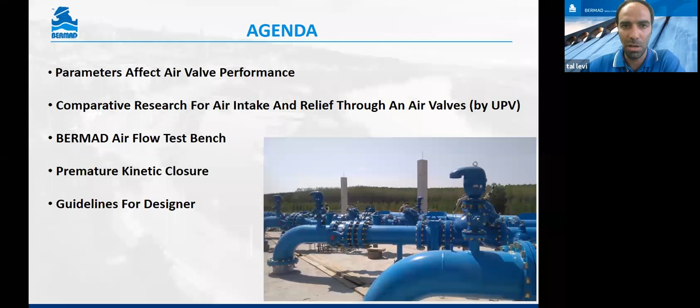So first, I would like to count together with you the 4 main needs and requirements why air valves are essential in water pipelines. First of all, the most common one that most engineers are familiar with is prevention of air pocket accumulation at high points.

On the high points, the air tends to accumulate, and some air which is dissolved in the water is released on those high points, which have relatively low pressure, or due to head loss along the line, it starts to be released from the water. And we get air accumulation on those peaks.

Of course, those air pockets create local head loss, and as we have more and more peaks along the line, we get higher head loss, which means that now the pump, for the same design flow rate, needs to provide higher pressure, okay? That, at the end of the day, is converted to higher energy consumption of the pump and higher cost for delivering the same flow rates.

So the first objective of an air valve is to release these air pockets and to maintain a full cross-section flow. That's the responsibility of the automatic orifice, a relatively tiny orifice between 1 to 4 millimeters in size.

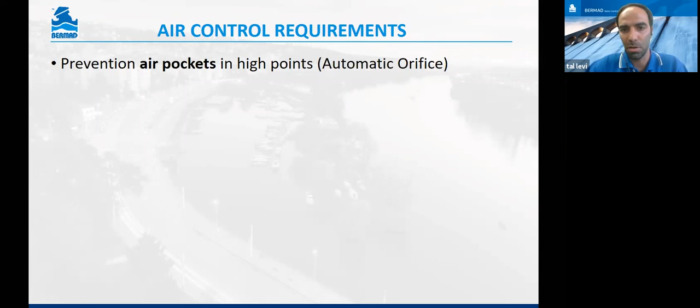So the tiny orifice of the automatic feature is relatively small due to the fact that it releases air while the system is pressurized, and opening a very small nozzle is enough to release those tiny volumes of air. So that's the first objective, and that's actually the only requirement and mission of the automatic orifice. During this presentation, we won't talk about the automatic orifice. We will focus on the kinetic orifice, okay?

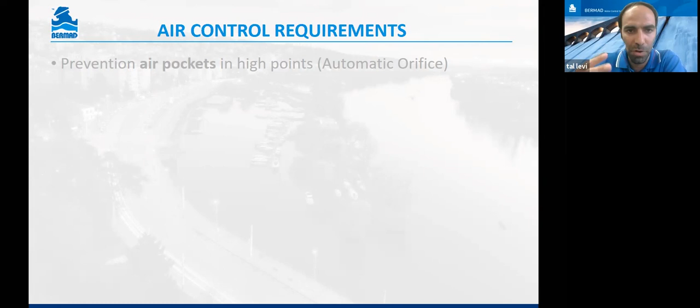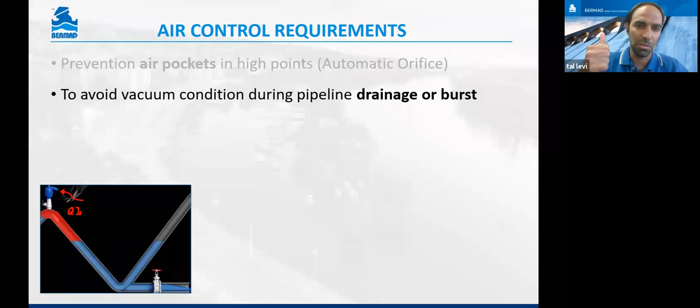The kinetic orifice is responsible for three main objectives. The first one is to prevent any vacuum formation during drainage or burst, okay? Whether you are doing maintenance or cleaning the pipeline and you drain the pipeline from a low point. So at this event, the air valve, in order to prevent vacuum on high points, needs to draw into the line high flow rates fast. So that's why we are using a large orifice, the kinetic orifice. So that's the first requirement.

The second requirement for the kinetic orifice is to allow safe and controlled pipeline filling within a reasonable time, especially in the irrigation sector, where the pipelines are filled and drained on a daily basis. So during a startup, the pipeline is full of air. We need to relieve this air in a controlled manner in order not to create pressure surge. And it's also done through a large kinetic orifice, which allows high flow rates. So that's the second objective of the kinetic orifice.

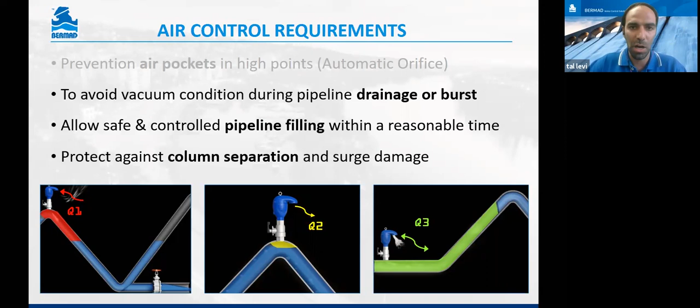The third, and from my point of view the most important one, is to protect against any transient scenarios which will lead to pressure surge, water hammer, and in severe conditions to water column separation, okay? For instance, we have a pumping station, and during pump shut-off, the water continues with its momentum to flow forward while water stops flowing from the pumps, and that means that between the check valve and the rest of the pipeline, water column separation and severe vacuum conditions might develop.

In order to prevent this water column separation, we need to draw into the line high flow rates of air, high volumes of air, and fast. So that's also done through the kinetic orifice. So basically, these three objectives are achieved by the kinetic orifice.

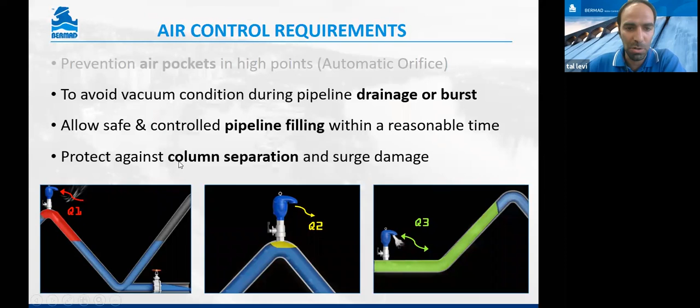And in case the performance of the kinetic orifice is not good enough, or it's not sized correctly, it will have a direct impact on achieving one of those goals, okay? So if the kinetic orifice is too small, there is a chance that the pipeline will collapse due to vacuum conditions, or rupture due to pressure surge.

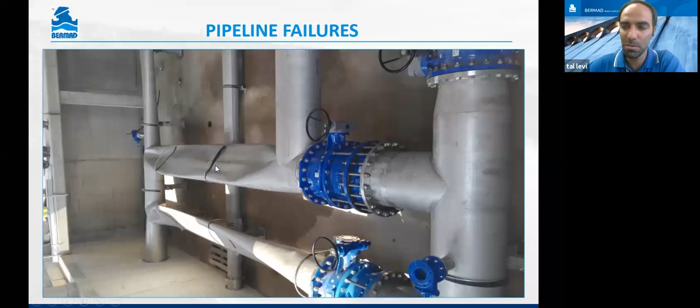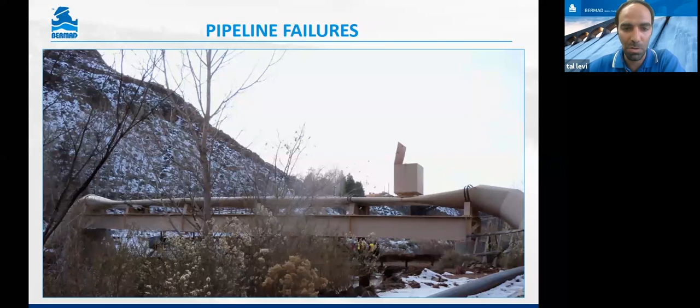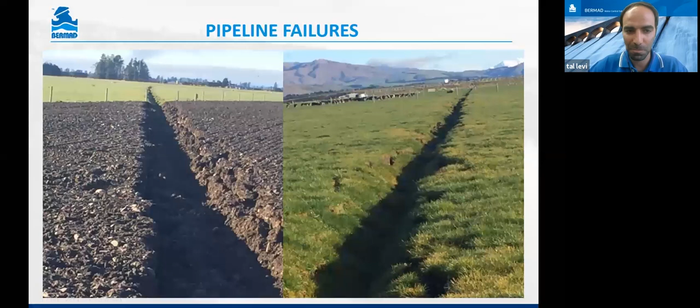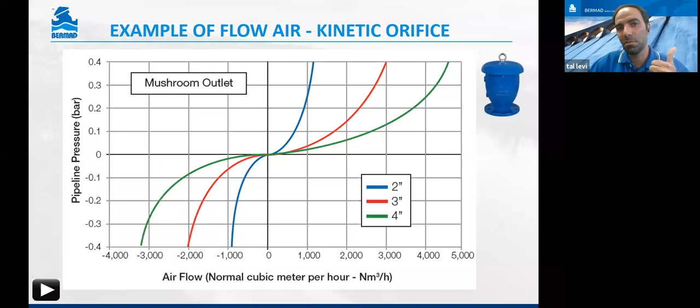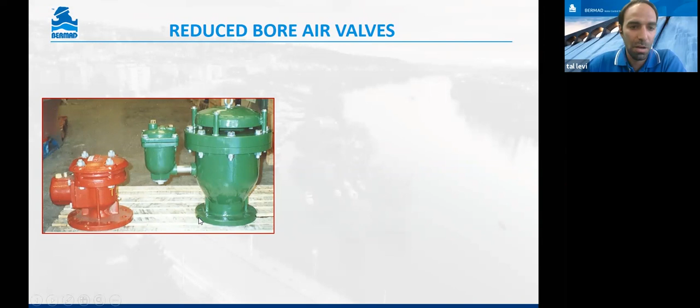Friends, what we are looking at right now, these two air valves, if we consider them in a tender specification, both of them are defined as 6-inch, okay? Because we define the size of an air valve based on its connection size. So both of them have a flange of 6-inch. However, and this is the kicker, you can see that the red one is dramatically reduced bore. The real passage of flow through the device is only 50 millimeter, while this one is a pure full bore orifice of 150 millimeter.

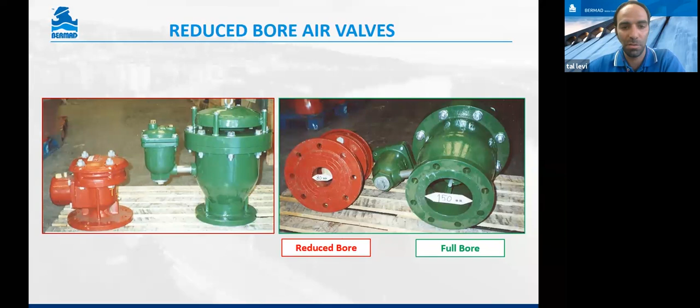Okay? So the second very important factor is what is the size or the actual passage of the kinetic orifice inside the product itself, and not only the connection. So at this slide, I would like to summarize together with you the three main factors which affect the performance of an air valve. First of all, that's the size of the kinetic orifice.

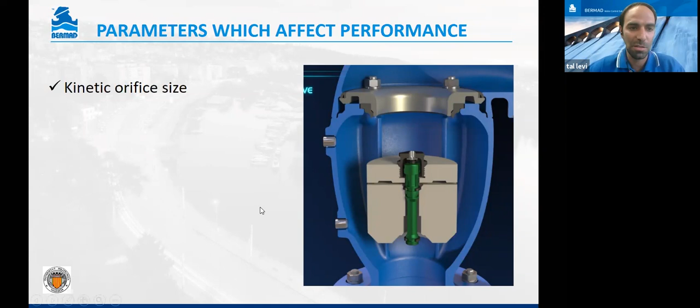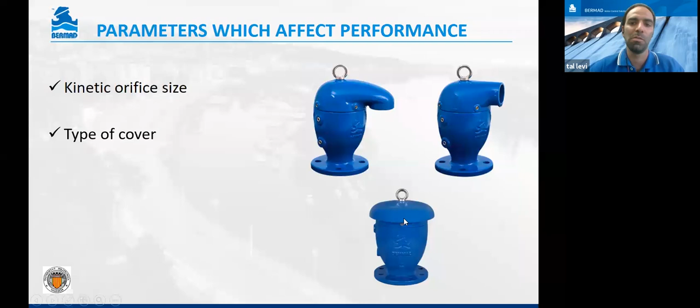The second factor, as we saw, the big difference in performance, is the type of the cover. So obviously the mushroom cover will bring higher performance compared to the down or the side. And the last factor, which is not less important, is actually the efficiency of the flow curve through the device, through the air valve.

You can see here in this demonstration that as those curves are more straight with fewer angles, the product will allow higher flow rates and will create lower head loss. Same as what we are doing with the 700 series valve or the 100 series valves. The only reason why they are Y pattern oblique is in order to create minor head loss, to allow as much flow capacity as possible and to make the flow through the control valve semi-straight. And that's what allows us to generate such high flow rates.

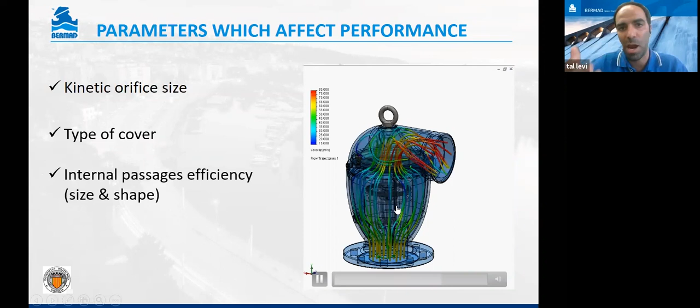Another important point while we are looking at the cutaway of this product: as you can see, all Bermad air valves are in the shape of an egg. The reason for that is to make the flow as aerodynamic as possible. In addition, there is an area between the float and the body itself. It's some kind of a ring between the float and the valve body. It's very important during the design to make sure that this ring doesn't create any bottleneck for the flow, and the total area of this ring is at least larger than the size of the inlet and the kinetic orifice. So those are the three main factors which will affect the performance of the kinetic orifice.

And before moving forward to the research, I will give a couple of minutes for questions. There are two questions here which I would like you to refer to. First of all, you didn't mention until this point the pressure rating or the operational pressure of the air valve. And the second question: is there any single coefficient that reflects the airflow capacity of an air valve, like a KV or CV value for a hydraulic control valve?

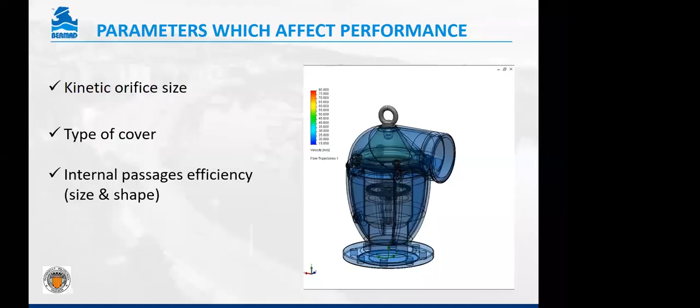The second question was regarding the KV or CV value, which is very common when we are referring to hydraulic control valves. So is there any equivalent coefficient for air valves? Basically, I mentioned that one of the factors is the internal design of the air valve, but hydraulic control valves are a well-established market. So the manufacturers have this factor which allows them to compare the efficiency or flow capacity of one product to another by only one factor, which is the KV value. However, in the air valve market, the manufacturers don't have this information.

In the technical literature, they mention something called the CD. The CD takes into account all those factors together, and considering only the size of the nozzle, you can say whether this nozzle will allow higher flow rates for the same diameter compared to a different nozzle of the same size but a different shape. This CD value runs between 0.45 and 0.57 or 0.6, but honestly, the majority of manufacturers don't really know the CD value for each of their products, and this value changes between sizes and models, and it's very difficult to measure. So that's why in the field of air valves, we don't have any single value with which we can compare the capacity of different products.

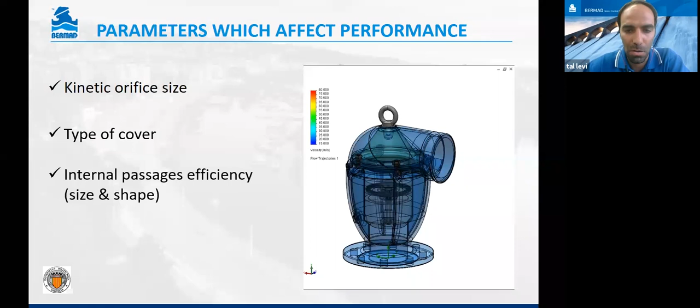Okay. So I will move forward in order to meet the schedule of 45 minutes. I'm preparing you, it might take a little bit longer, but I promise not to create too much delay. So we will start now and move forward to the research.

So basically, this interesting research is being done by the University of Valencia.

They contacted BERMAD in 2014, asking permission to use our one-of-a-kind airflow test bench. In the next slide, I will explain exactly why this airflow test bench is so unique.

And they conducted a relatively wide and interesting research, collecting air valves from global manufacturers worldwide, making measurements of the performance, and giving answers to several questions, one of which was: is it correct to choose an air valve based on its inlet size? We will give an answer to these questions at the end of the presentation, which I'm sure most of you can already think about.

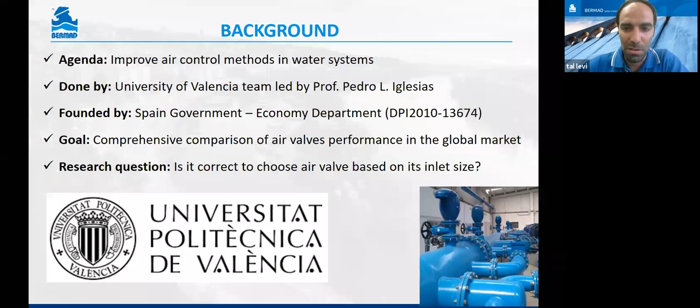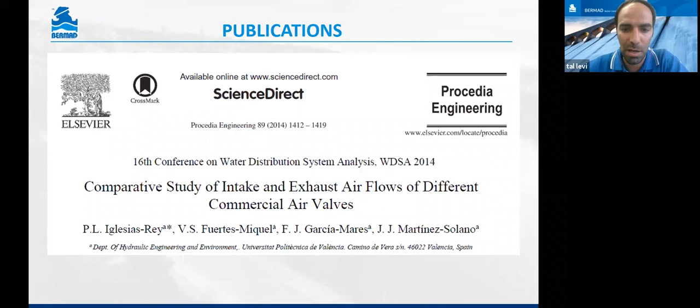So basically, the complete version of this study you can find on the internet. Look for comparative study of intake and exhaust airflows of different commercial air valves. In this case, I found it on the website of Science Direct, and you will be able to read the entire process, all the insights, and that's quite fascinating and interesting.

So, BERMAD airflow test bench. We got into the market of air valves about 10 years ago, and we decided that we want to have a facility which will create hydraulic or aerodynamic conditions which are the most similar to what happens in real pipelines in the field. And that's why we came out with this unique concept of an airflow test bench with a very large blower, which allows us to do two things.

First of all, to make a continual measurement. That means that we can keep both the air pressure and the flow rates constant for several minutes, and make several measurements to make sure that the measurement and the result are really consistent.

Some of the manufacturers do also have an airflow test bench, but those test facilities have a different design and different concept. They rely on the concept of having a pressurized vessel, let's say in the size of 5 or 10 cubic meters, charged with a pressure of, let's say, 1 or 2 bar, and then they open a valve fast and allow the air from the tank to flow to the pipeline through the air valve, and by that measure the outflow through the device.

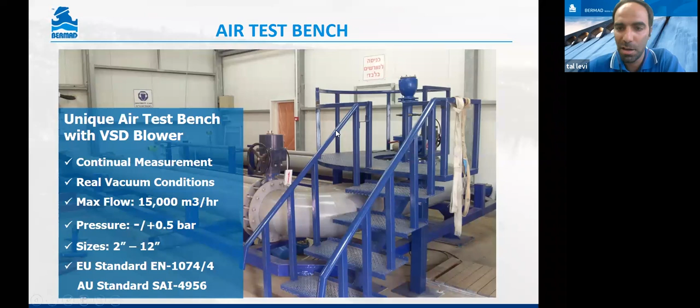And I would like to share with you a nice video showing a measurement experiment of the C70 3-inch with down cover. During this video, you will hear very loud noise. And we are talking only of pressures of 0.3 or 0.4 bar, which is considered in water relatively low pressure. However, in air, this brings very high flow rates, which are very noisy. So along this video, I will stop every now and then to give some explanations.

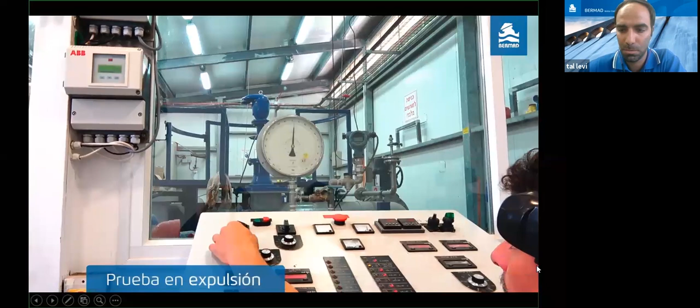Okay, so now the operator is increasing the pressure. You can see in this gauge the pressure. So this is 0.1 bar. It will reach up to 0.45 bar. And you can see the outflow through the device.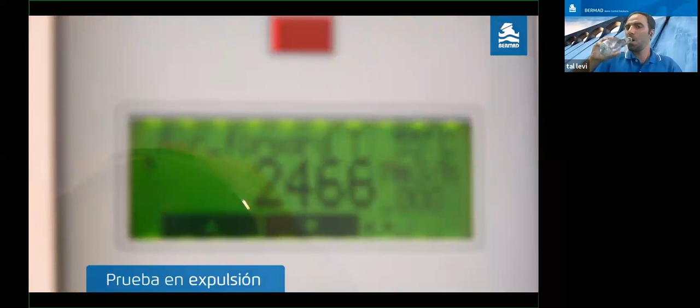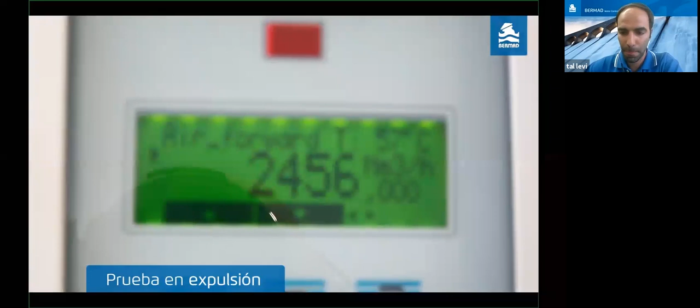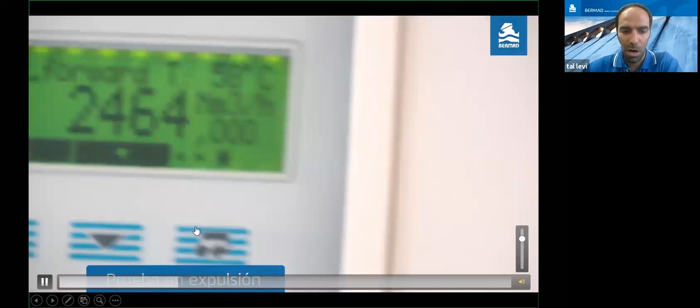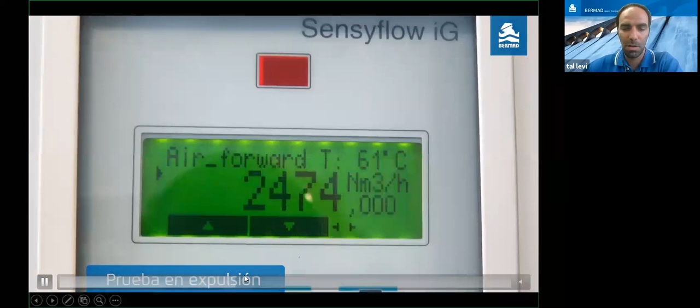So at a pressure of plus 0.45 bar, this product will release about 2,500 cubic meters per hour. Okay. I will move it forward, showing you the vacuum conditions. So you can see here that it says air forward. It means outflow from the pipeline to the environment.

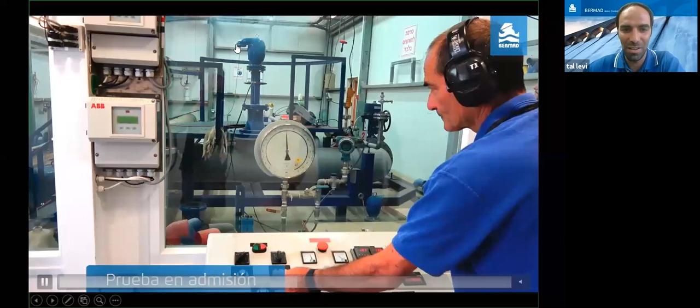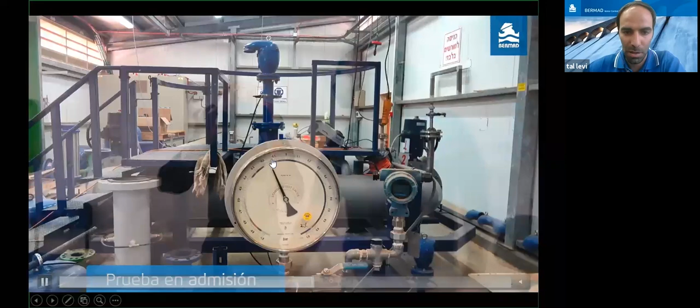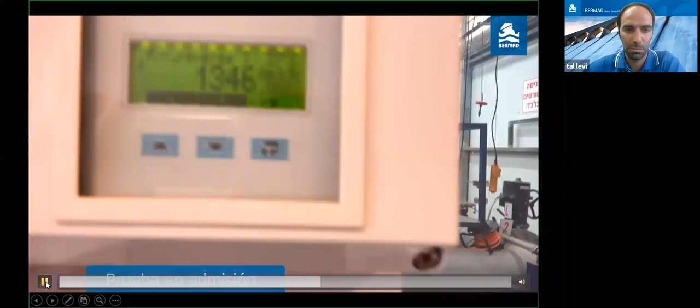So we have this nice toy here, the smoke machine, in order to get a visual demonstration of the inflow. So increasing and creating vacuum conditions, you can see here in the gauge the negative values, minus 0.1 bar, minus 0.2 bar. And air in reverse means that now the inflow is 1,500.

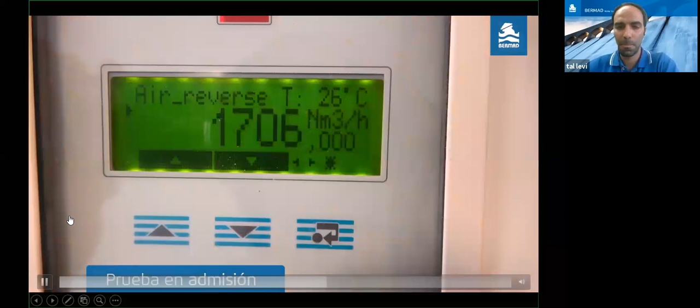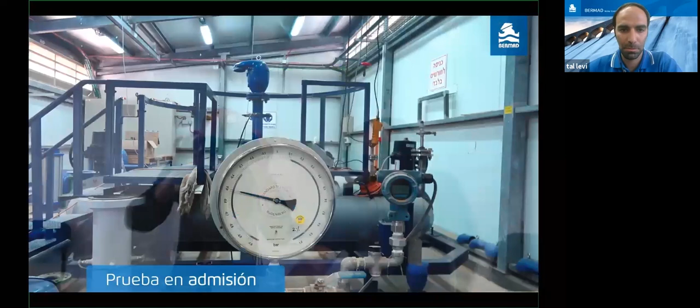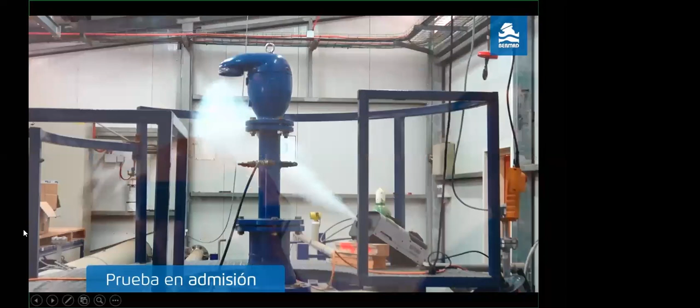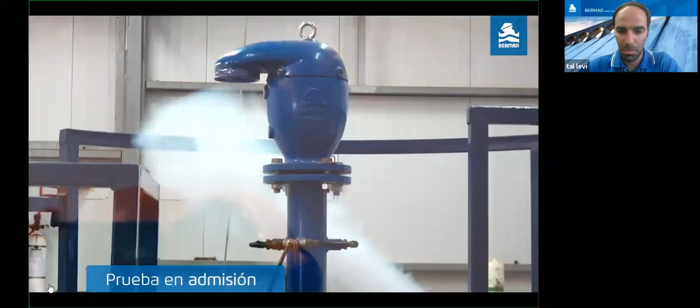Well, we don't hear the videos. Maybe you will open it only for a couple of seconds, so we'll have some real effects of the noise. Sorry again? We don't hear the sound of the video. Okay. So, consider opening it maybe only for 3 or 5 seconds, so we'll get an impression of the sound. Okay. I would like to press. Tell me if now you can hear it, please.

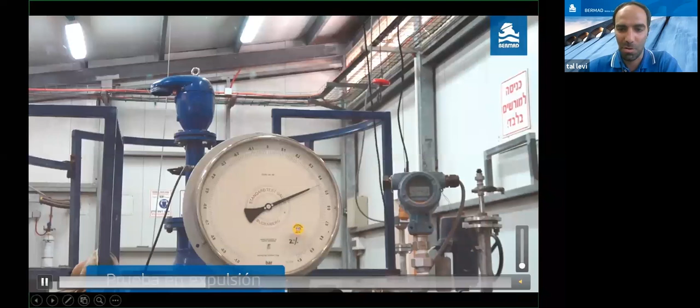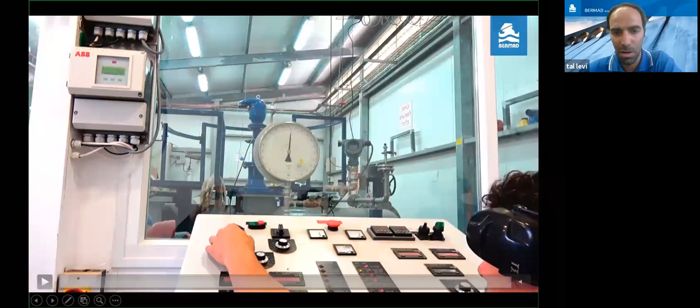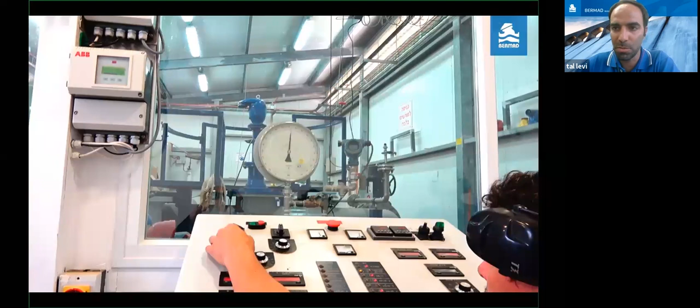As you can see, it's quite noisy. And also, as you saw, the outflow and the inflow are not the same values for the same pressure of plus 0.4 bar or minus 0.4 bar. So that's a really nice and one-of-a-kind facility, and that's the reason why University of Valencia decided to come here and make 2 full weeks of measurements without the intervention of BERMAD. So now let's move to the results.

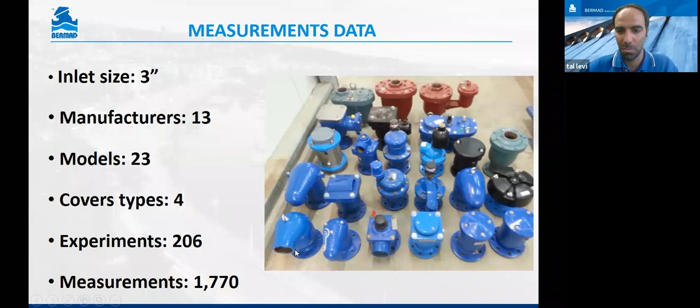So they decided to focus on a medium size of flange collected from 13 different manufacturers, and in the end they reached almost 1,800 measurements. You can see here a picture of some of the valves, and that is the result. Quite interesting, different colors. In order to make an apples-to-apples comparison, all of them are flanged. And what we can see here is the following. Again, we have the pressure, we have the flow rate, positive values for outflow and negative values for inflow.

Each curve, each color represents a different model, okay? While all of them, in the tender specifications, are considered equivalent products, because all of them are defined as a 3-inch air valve. But look, for example, at this red curve here, that for the inflow of minus 0.4 bar allows about 400 cubic meters per hour, while some other products allow more than 1,500, or some of them even reach 2,000. You can also see the big difference for the outflow, which is quite obvious.

And I must say that the first time I looked at those graphs, I was quite in shock. Because if you take the field of hydraulic control valves, sometimes you can expect a difference in the KV value from one product to another of 50% higher or 70% higher or even 100% higher. But here it's 500% higher. We have a ratio of 1 to 5 in performance between some products and others. So that was just unbelievable.

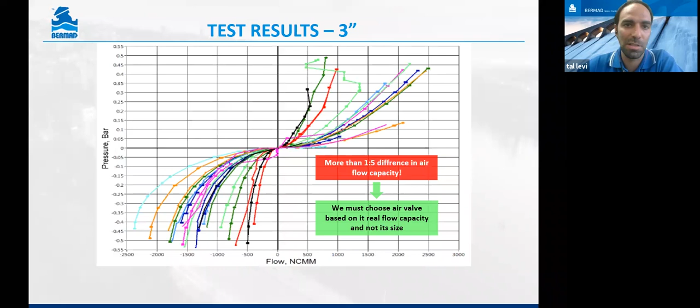And considering this quite astonishing result, it's obvious that each one of us as designers must pay attention and choose an air valve not based on its inlet connection, but based on its real flow performance, its real capacity. So that was certainly an interesting graph. The green one over here refers to C70 down cover, while the orange is the C70 with mushroom cover.

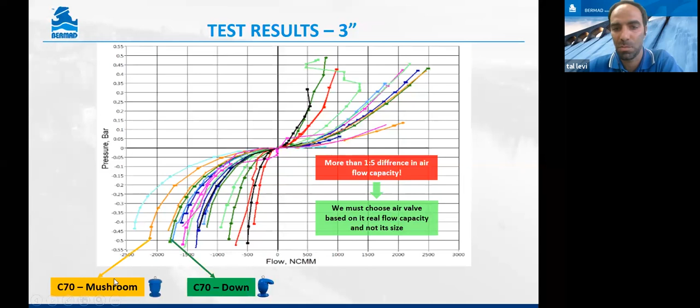The next graph is also quite interesting. It's focusing on 3 different manufacturers, each represented by a different color. The solid line shows what the manufacturer published in the product catalog page, in the data sheet, while the dashed line shows the measurements in the experiment itself. So you can see that for the outflow, for all 3 products, the publications quite match the measurements. However, for the inflow, there was a big difference.

For instance, look at the blue model, which publishes in the catalog page that it is able to allow at minus 0.4 bar almost 3,000 cubic meters, while in reality this product introduced into the line only 1,000. So there is a big gap. And I want to believe, and I'm quite sure, that most manufacturers don't do it on purpose, but since most of them don't have any airflow test bed to make measurements, they rely on publishing those curves based on physical formulas, which don't always match the real capacity of the product.

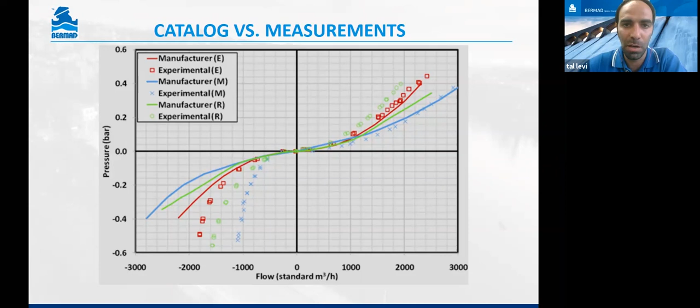Okay. So just before we finish, I would like to share with you the interesting phenomenon of premature kinetic closure. Premature kinetic closure is something which happens in any air valve due to the basic fact that the float itself isn't made of wood or metal. It's made of a lightweight material which must float on the water when it reaches the air valve, in order that the air valve will seal and won't leak.

So in any air valve, there is a point where the outflow, the flow rates are very, very high during pipeline filling or during a pressure surge. And the velocities are high, and that creates a situation where the float is being lifted up, dragged upwards, and the air valve closes prior to the arrival of the water to the air valve. So that means that now the air valve is completely closed, while there is still volume of air trapped in the line. And that can lead to two things.

First of all, that can lead to pressure transients due to the fact that air can compress and expand very fast. And the second factor, which is not less important, is that it will stop completely or will slow down dramatically the filling of the pipeline, the filling process. And if we are talking about national pipelines, large diameter pipelines, that means that now the downtime of the pipeline is much longer, and of course it will increase the cost of making this maintenance, and the impact on the citizens and the consumers.

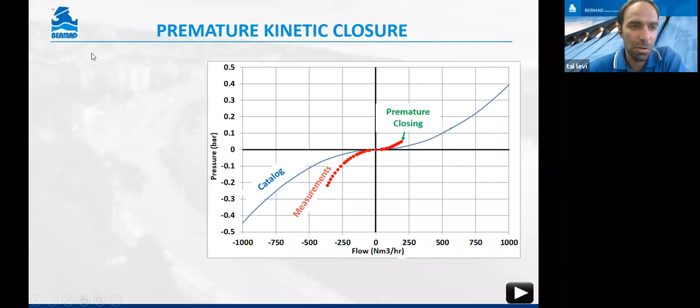So the premature closing is something which happens in any air valve. The question is whether it happens in pressure of plus 0.4 bar or 0.5 bar, or it happens in pressure much lower, which is let's say +1 meter or 0.5 meter, which is somewhere around here. So that's also something that University of Valencia tested, and you can see here models with titles from A to N.

So you can see that some of the products closed at pressure of 0.25 bar, which makes sense because during pipeline filling, designers consider that the pressure of 0.2 bar, which is plus 2 meters, is relatively high pressure during pipeline filling. So if the kinetic premature closure of an air valve happens above plus 2 meters, that means that very likely the air valve will do its job and you won't expect any issues.

However, in cases where the premature closure happens at lower values, below 2 meters, then you might have issues, and you can see that some of the products here, like for instance the model E or G, closed already at pressure of 0.3 meter. Those values are here in bars, so this one and this one is only 30 or 70 centimeters of pressure. So very likely those will close before relieving all the volume of air. In this case, model D, it's the C70 with down cover.

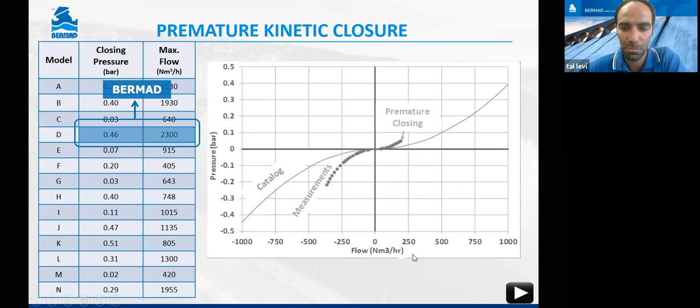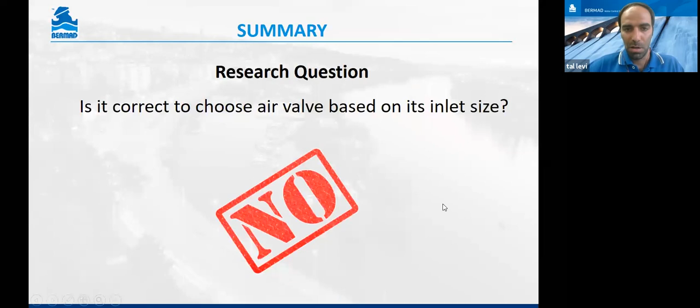And now let's move to the last part, friends. The summary. So back to the research question: is it correct to choose an air valve based on its inlet size? Then of course the answer is a big no. And I would like to share with you 3 guidelines, which I see as the most vital recommendations for designers who do sizing and positioning of air valves.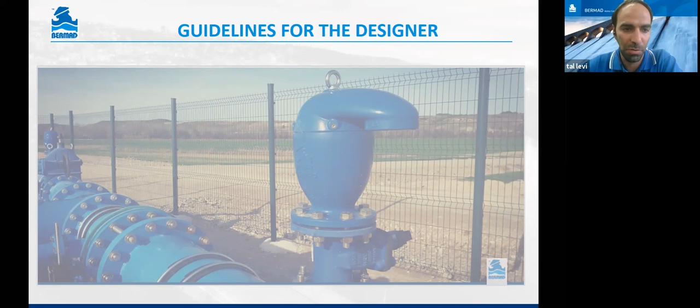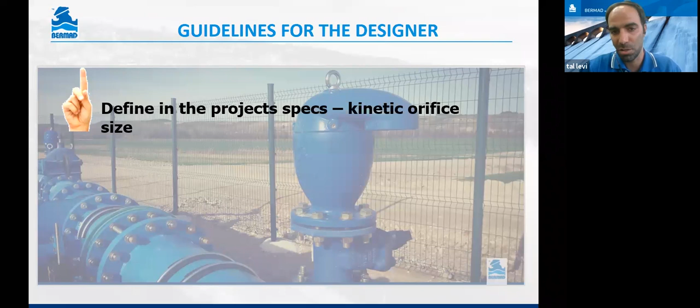So first of all, pay attention to the size of the kinetic orifice. I get during a week several project specs, and in most of them it's clear to see that the specifications are referring only to the size of the connection. So please, as designers, put also in the specification the size of the kinetic orifice. The kinetic orifice is the bottleneck of the flow through the device, and it must be defined clearly in the specification. So the first point is the size of the kinetic orifice.

The second one is to choose an air valve based on its real airflow curve, and make sure that it's based on a certified airflow test bench. So for any manufacturer whose air valve you consider using, ask them to share with you where they get the data from.

And the third rule is to make sure that the air valve doesn't close below 2 meters, that the premature kinetic closure is not happening below 2 meters. I can tell you one thing, that the manufacturers don't publish the premature closure. In all their publications, you will see that the curves continue to plus 0.4 or even 0.5 bar.

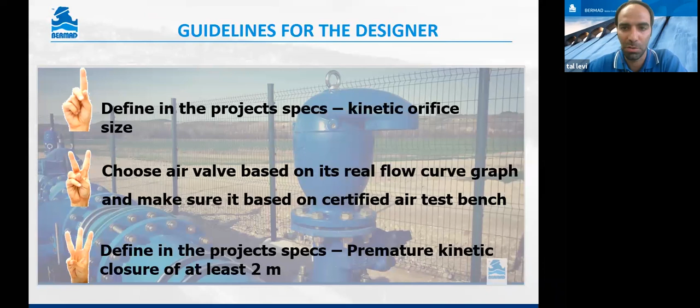Even in this particular product, the air valve closes much earlier. Perhaps they don't know this value, or perhaps due to the fact that all the other manufacturers don't publish this value, they don't publish it either. But ask the manufacturers to get this value for the air valves that you plan to specify. So these are the 3 fundamental guidelines that, from my point of view, are very important to consider.

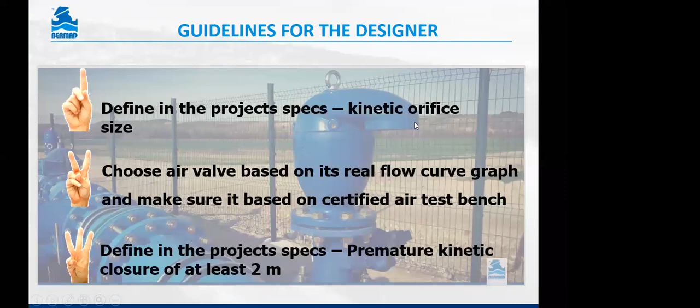The question which I selected is: how do I choose an air valve size? So please refer in short to some of the principles for sizing, and also is there a rule of thumb, for example, in proportion to the main pipeline diameter?

Okay, so that's quite an interesting and popular question. I know that many of the designers are used to make the selection of an air valve in proportion to the main pipe diameter, let's say in the ratio of 1:5. So if the pipeline is 20 inch, I will select a 4-inch air valve. However, I don't like this approach, okay?

The best method is to run an analysis based on one of the software, like BERMAD offers the BERMAD Air, which illustrates scenarios of pipeline drainage, burst, pipeline filling, etc., and then to perform surge analysis. But if you don't have this luxury and the time of performing a complete analysis, you can use the following rule, which takes into account not the pipe diameter, but the flow rate.

Because in the same diameter, we can have quite a wide range of flow rates. Most of the designers are used to design at velocities of between 0.5 to 2.5 meters per second. So for this reason, since during water column separation the intensity occurs in direct proportion to the velocity in the main pipeline, I will choose the size of the air valve in proportion to this velocity, meaning in proportion to the design flow rate.